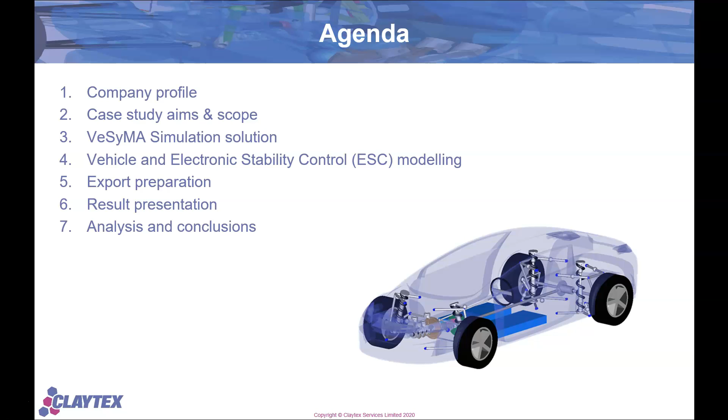To start with, we'll give a brief rundown of Claytex as a company before further elaborating on the specific aims of this case study. The vehicle model, control and export process will be explained before presenting the results of the study.

Based primarily in the UK, but with satellite offices in the USA and South Africa, we cover all aspects of vehicle simulation, from internal combustion engines to driveline components, vehicle electrification, electrical and HVAC integration to vehicle dynamics, chassis platform modelling, and autonomous and ADAS simulations.

Much of this expertise was developed originally when working with motorsports customers in Formula 1, NASCAR and IndyCar, but has been expanded to the OEM and Tier 1 sector as development practices have evolved. Working with Dassault Systèmes, we produced the VeSyMA suite of libraries, a Modelica-based simulation library for use in Dymola.

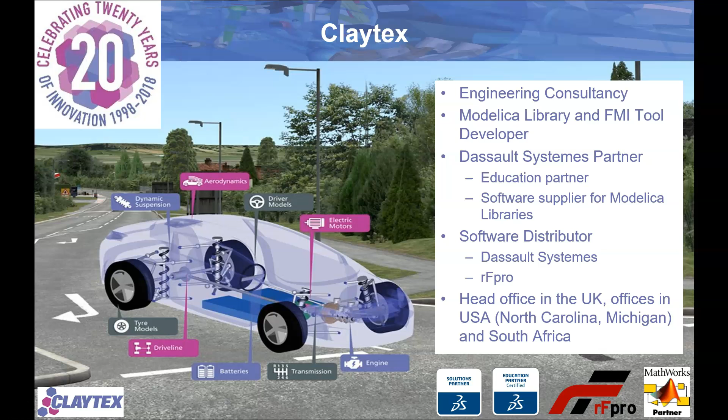This case study forms a useful exercise in demonstrating the suitability of the VeSyMA library as a basis for distributed high-fidelity vehicle simulation. As a development exercise, case studies like this enable us to handle our products as would-be customers and understand them better from that viewpoint.

This case study provided understanding into some aspects of the challenges of exporting our vehicle models and experiments as FMUs for deployment. To achieve those aims, a vehicle experiment complete with control model found within the VeSyMA product will be benchmarked with and without an ESC controller within Dymola to start with.

Next, a vehicle experiment without the control model will be exported as an FMU and run in Simulink as a standalone model in order to understand any effects of the export on the performance of the vehicle model. After this, the FMU was run in Simulink with a Simulink interpretation of the ESC controller.

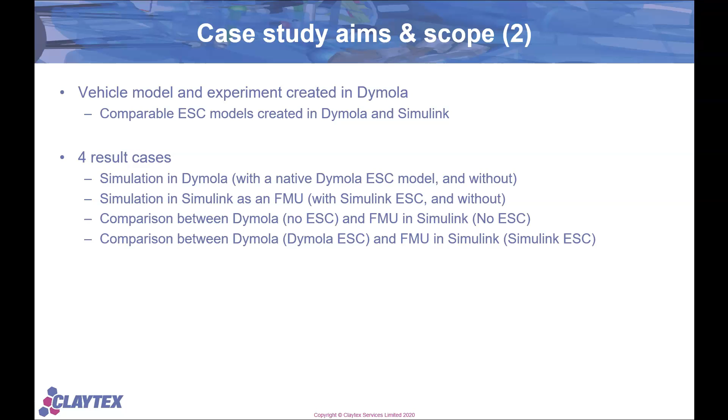With these results, comparison results were plotted with the FMU performance without ESC in Dymola and Simulink. Finally, a comparison is made between the experiment in Dymola with Dymola-based ESC and Simulink with Simulink-based ESC to better understand the challenges of interfacing models with the FMU.

The experiment which forms the basis of this study is a cone slalom test, with the vehicle trying to navigate between the cones whilst holding a speed of roughly 31 miles an hour or 14 meters per second. The cones are close, only 15 meters apart. To make sure the vehicle is more unstable, an 80 kilogram extra trunk payload has been added.

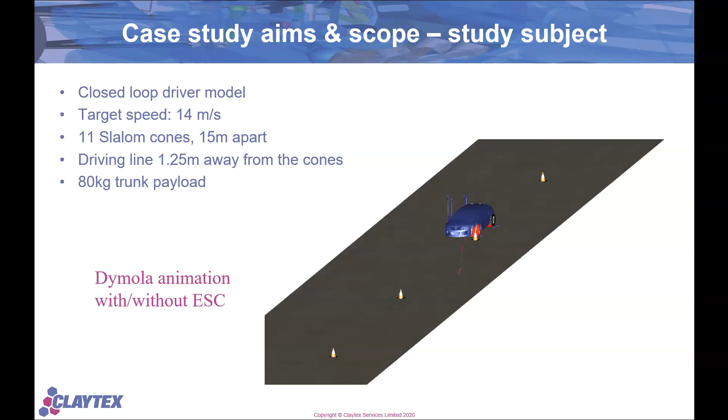You can see from the animation of this experiment running in Dymola that the ESC is effective in keeping the vehicle under control versus no ESC. Models for this case study were taken from the VeSyMA suite of libraries, which is a complete vehicle simulation solution based in Modelica. It is comprised of a series of Modelica libraries based on the VeSyMA library itself with subject-specific extensions.

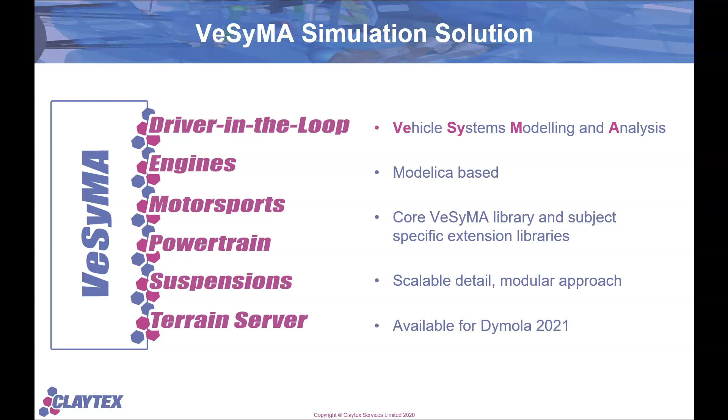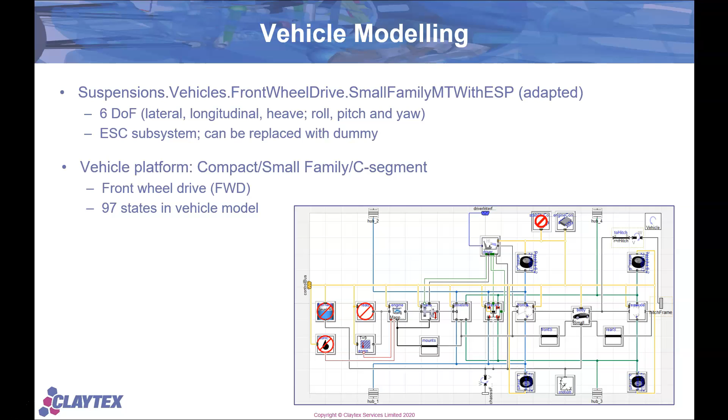The vehicle model used in this case study is adapted from a generic front-wheel drive compact segment vehicle model found within the VeSyMA suspensions library. As this is a full multibody vehicle model, it is capable of the full 6 degrees of freedom, therefore all pitch, roll and yaw is captured as well as lateral, longitudinal and heave motions.

Looking into the subsystems of the vehicle, we can see that the Pacejka 6.2 tire model is used with an aerodynamics model capable of capturing the lift, drag and side force. Rigid subframes are used, as are ideal, so no compliance of bushings, multibody front and rear suspension models, double wishbone at the front and multilink at the rear.

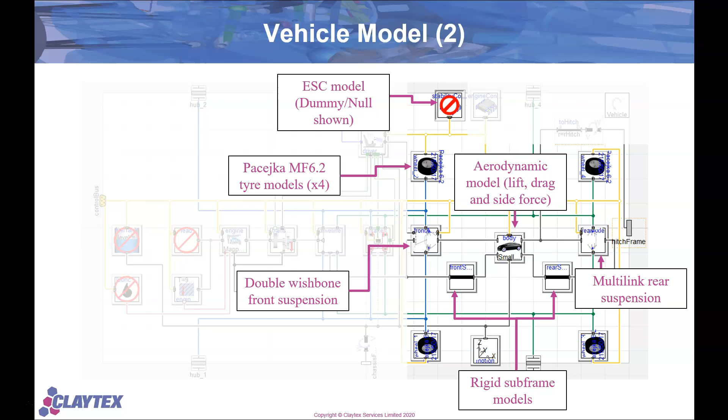This vehicle template is also equipped with an electronic stability controller module. This is replaceable with a dummy model shown. The ESC communicates with the vehicle through the control bus, which is an expandable connector analogous to the CAN bus.

Moving on to the other vehicle subsystems, a fixed mass fuel tank model is used, as is a mapped engine model, and no front end accessory drive model is used. Therefore, no parasitic losses caused by things like alternators connected to the serpentine belt are modelled. A 1D rotational driveline model is used, featuring an open differential, connected to an idealized paddle shift transmission model.

A pseudo-hydraulic brake subsystem featuring individual multibody brake models is used. The ESC affects the vehicle's dynamics through a pump model, which is controlled by signals on the control bus. This brake subsystem is termed pseudo-hydraulic because it is entirely real signal-based, i.e. there are no fluids being physically modelled in the subsystem.

These simplifications have been made for simulation speed, as we are not overly concerned with the total vehicle fidelity for this case study. Any of these systems can be replaced in this vehicle model with higher fidelity ones, such as a fluids-based hydraulic brake model capable of capturing the full braking dynamics if desired.

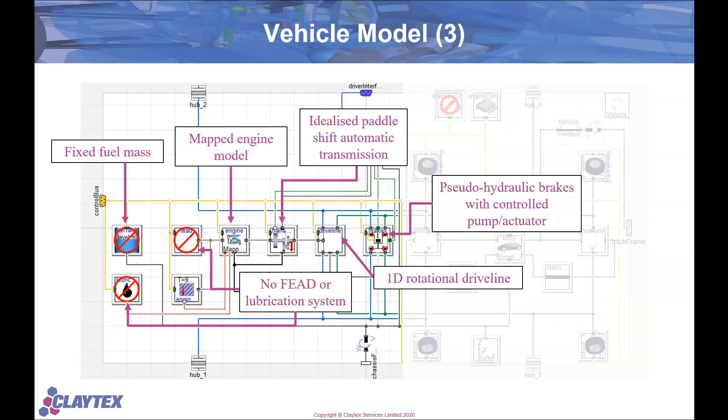The electronic stability control algorithm responsible for calculating the corrective brake pressure at each vehicle corner used in this case study is relatively simple. An error between the vehicle's actual yaw rate and a theoretical desired yaw rate of the vehicle, which is based upon the steering angle input by the driver model and the understeer gradient of the car, is calculated. The yaw error then drives a PD controller to determine the corrective brake force used.

Effectively, this means that the electronic stability control serves to control not only oversteer but also excessive understeer. Lookup logic tables dependent upon vehicle parameters such as lateral acceleration and understeer gradient determine the brake force distribution at each wheel.

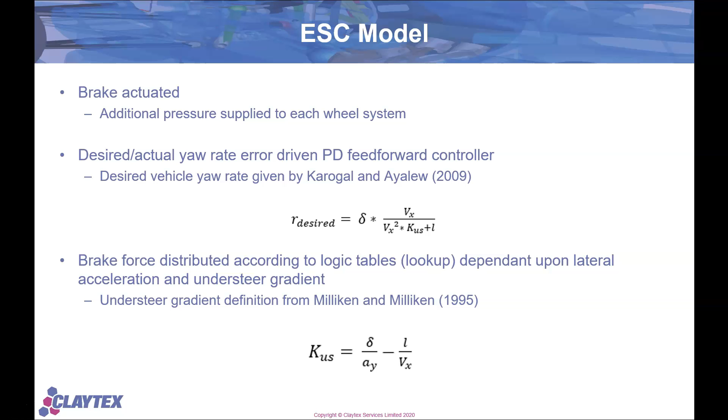The algorithm described on the previous slide has been replicated in both Simulink and Dymola. Whilst the ESC models were validated against one another to produce the same outputs, there are modelling differences between them. The Simulink model, for instance, makes use of triggered and enabled subsystems to change the controller state, whereas the Dymola one uses logic tables to effectively switch off functionality by multiplying signals by 0. The Dymola ESC model was taken from the VeSyMA suspensions library.

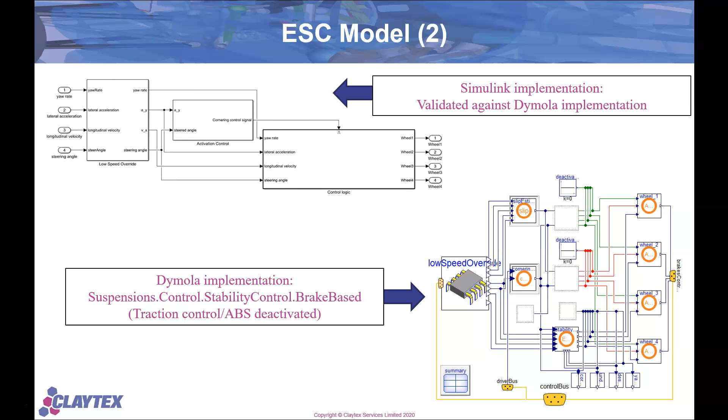The experiment this case study uses as a basis was taken from the VeSyMA suspensions library. All elements required to simulate the cone slalom test outlined previously can be found in this example vehicle experiment, including the road model containing the driving line the vehicle is to follow and the atmospheric conditions of the simulation environment. Both these models are replaceable, enabling high fidelity ones to be easily deployed in the experiment if desired.

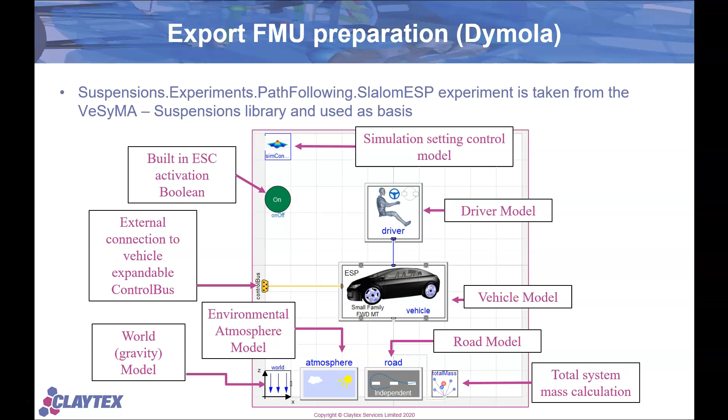The driver model is independent of the vehicle model itself, meaning the vehicle specification can easily be replaced without impacting upon the driver model settings by redeclaring the model. All VeSyMA vehicle experiments feature this same template. As the control bus has been declared at the top level of this model and connected to the vehicle model, this vehicle experiment can be configured into an FMU easily.

As I mentioned earlier, the control bus is an expandable connector analogous to a CAN bus. As it is expandable, additional signals can be added to the bus easily, which is precisely the method used to produce the small family vehicle equipped with the ESC as found in the VeSyMA suspensions library.

As the FMU we are creating for this example requires inputs and outputs into the vehicle model to interface with the external ESC model in Simulink, Modelica standard library input and output classes are placed at the top level of our simulation. By connecting the outputs to the existing signal sources on the control bus, such as yaw rate and lateral acceleration, vehicle variables can easily be exposed to the outside when deployed as an FMU.

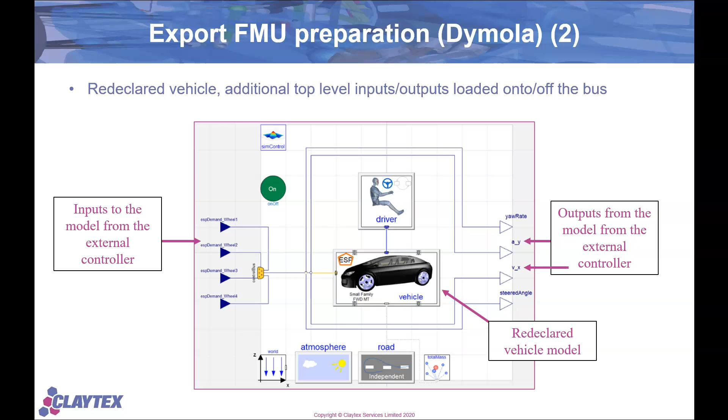The inverse, using input classes connected to signals with no source on the control bus, such as the ESC demand, enables control inputs to be fed into the vehicle from outside the FMU easily. This means that configuring a vehicle experiment from the VeSyMA libraries into an FMU with a bespoke input-output interface is a very simple task.

For this case study, co-simulation using CVODE was chosen. There are two reasons for this. The first is that we desired the vehicle experiment FMU to run in Simulink using the Dymola solver for ease of use and deployment. The second is that this option is available to all Dymola users without needing additional license features. All results from the vehicle experiment with and without the ESC running within Dymola use the CVODE solver with the same solver tolerance as used in the exported FMU.

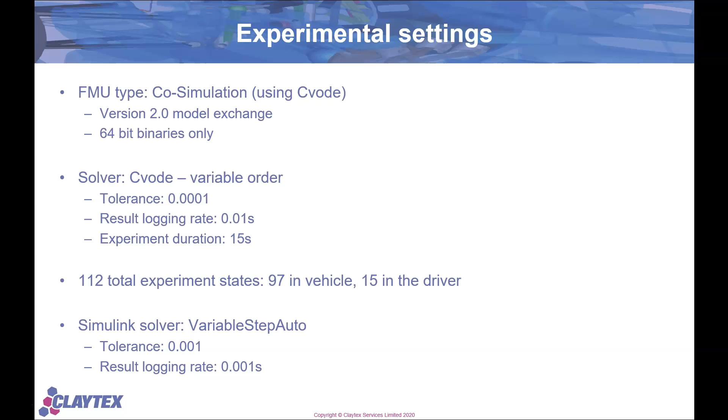During compilation, Dymola selects 97 states within the vehicle model and 15 states within the driver model for an experimental total of 112, making for a detailed vehicle model. All simulations conducted in Simulink use the default variable step auto solver with a default tolerance of 0.001.

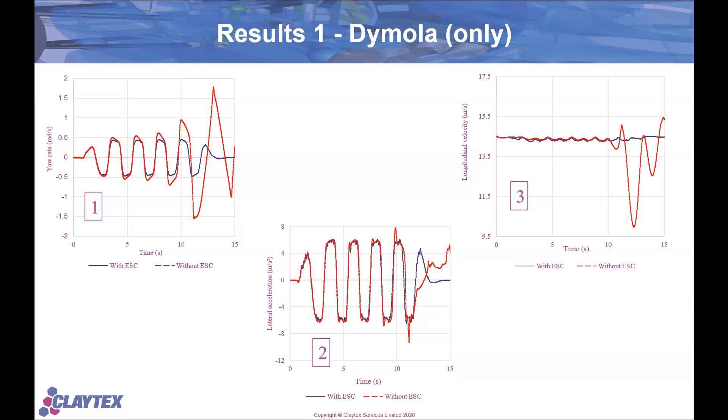Our initial results are from the vehicle experiment simulation within Dymola, with and without an ESC model attached. These are plots of the yaw rate, plot 1, lateral acceleration, plot 2, and longitudinal velocity, plot 3. These demonstrate how, without electronic handling assistance, the vehicle begins to oversteer out of control in the second half of the test, as the vehicle is unable to complete the slalom course at the target speed.

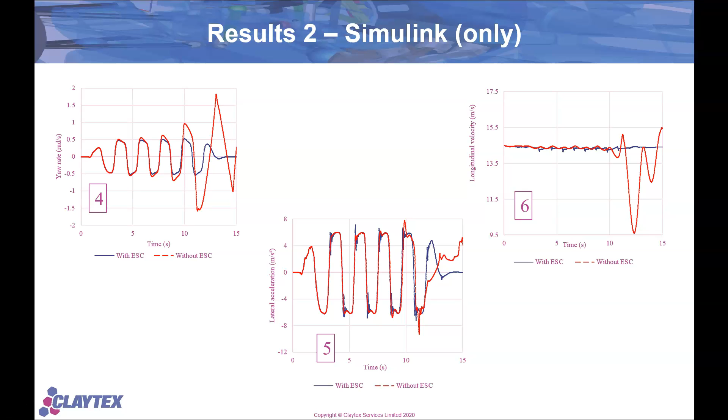Our second set of results feature the vehicle experiment exported as an FMU without an ESC unit embedded inside it. This is run within Simulink and then run again within Simulink connected to a Simulink build of the electronic stability controller. Once more, plots of the yaw rate, plot 4, lateral acceleration, plot 5, and longitudinal velocity, plot 6, show that the vehicle cannot complete the test without electronic stability assistance as it oversteers out of control near the end.

Moving on to the comparisons between the experiment with ESC within Dymola and the Simulink ESC implementation connected to the FMU exported of the experiment, some small differences can again be observed. Generally, the vehicle model appears to be more unstable when controlled by the external controller within Simulink versus the internal controller in Dymola. This is shown by the high yaw rate in plot 10. Higher, very localized peak accelerations in plot 11, coupled with a higher yaw rate and larger drop in longitudinal velocity in plot 12 also suggest this.

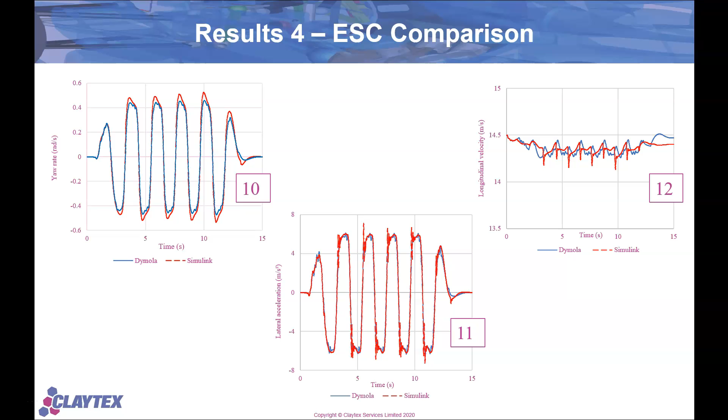Although the trends between the two tests correlate, indicating the ESC is interacting with the vehicle in the same manner, there is enough difference in the result to warrant comment. Some element of this difference is likely to have been caused by the different refresh rate the internal Dymola ESC controller and the external Simulink ESC controller will have, owing to the different controller solver in these two tests.

The next point to consider is the action of the ESC control on the actions of the solver in each environment. When combined within the same model in Dymola, any actions of the controller, such as zero crossing or state events, will trigger solver functions which affect the results and simulation of the whole vehicle model. Finally, it is worth remembering that the driver model within the experiments functions as a closed-loop driver model. Therefore, any differences in vehicle response will be amplified by a different driver model response.

Analysis of the computational time of each test case indicates that the vehicle experiment ran comparably both within Dymola and within Simulink as an FMU itself. Whilst there is substantial time differential between the cases featuring an ESC controller, the margin of difference can be attributed to the extra simulation overhead associated with syncing the two models together during time integration. Potential actions to minimize the simulation time penalty include evaluation of various Simulink solvers, using a fixed step instead of a variable step solver, for instance, and optimizing the sampling and exchange rates between both the plant and the controller model.

Given the differences in simulation times between the experiment in Dymola with the Dymola ESC and the FMU deployed with the Simulink ESC, we can deduce that it is the impact of the varying solver rates between the plant and the controller causing this significant time penalty. One option to remedy this would be to try and convert the plant FMU to run a fixed step solver at the same time step as the controller refreshes to minimize solver stopping and restarting overheads.

Simulink allows the user to specify fixed sampling rates for parts of the model, and that would be applicable in this case. As the simulation speed was not of primary importance to this case study, no actions were taken to optimize the execution speed, therefore this can be assumed to be the worst case scenario when dealing with VeSyMA models.

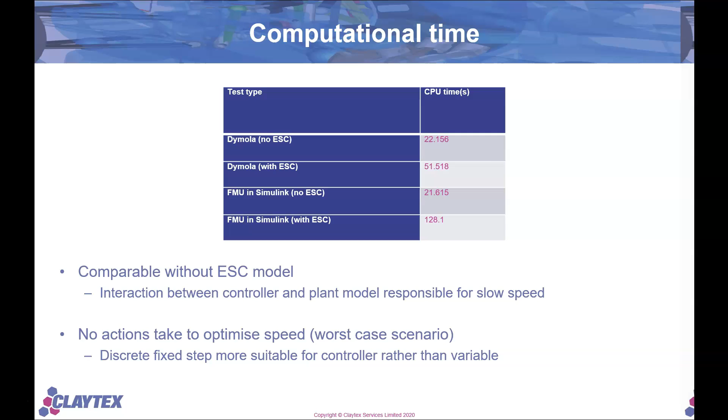Fundamentally, this case study demonstrates that the vehicle experiments found within the VeSyMA library are suitable for being used as a distributed high-fidelity vehicle simulation solution. Whilst there are some significant time overruns found in this exercise, we are confident that actions taken to remedy them, as established in other literature, would be effective.